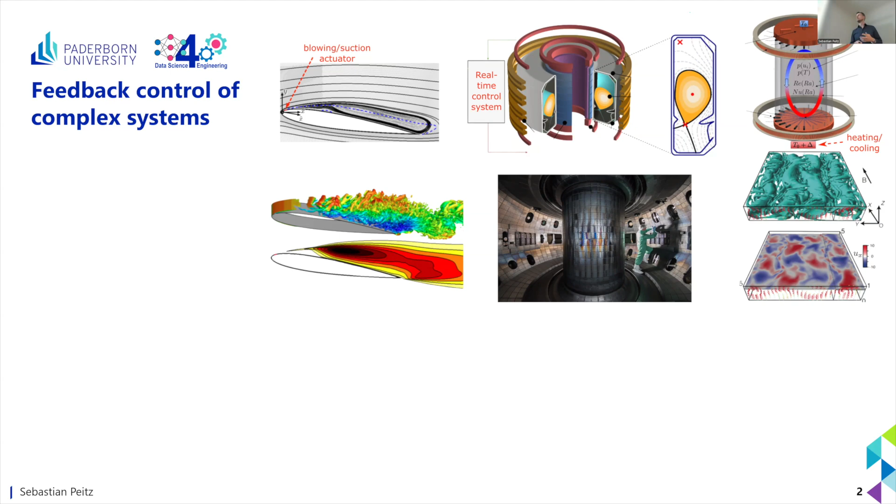This is a rather lengthy title, but maybe we can jump over this and dive right into what I want to do. So my overarching goal in my research is to study complex systems, mostly governed by partial differential equations. So potential applications: fluid mechanics, aerodynamics, we're starting to look into coupled physics, magnetohydrodynamics, where you have even more complex physics, or Rayleigh-Bénard convection, where you have these buoyancy-driven flows. So all of these systems are governed by PDEs, so the state is dependent on space and time.

And standard numerical discretization schemes like finite elements, finite differences can usually be used, and they are super accurate and also efficient by modern standards. But still, if the complexity becomes this high, then they tend to be very expensive to simulate. We need high performance computing to do so. And even more problematic is this if we want to use the model several times, determining feedback laws or solving optimization problems, so classical multi-query contexts.

So this is true for two topics that I would like to cover today, which is the control case using model predictive control on the one hand, so I'm using a model to solve an optimization problem online, and reinforcement learning, where I try to train an agent that learns by trial and error with the system how to optimally influence it. And so the aim, since these are so expensive, is to exploit structure in the system to learn models or learn control laws in a more efficient manner.

And what I mean by structure is something I'm going to talk about in quite a bit of detail. Structure also means I can use a learning algorithm that specifically is tailored to dynamics. And this would be a simple structure: I know that I'm dealing with dynamical systems. But we are also going to talk a little bit about symmetries. Can I use additional knowledge on my system so that it is even more efficient to solve the learning problem, and then use these models further on?

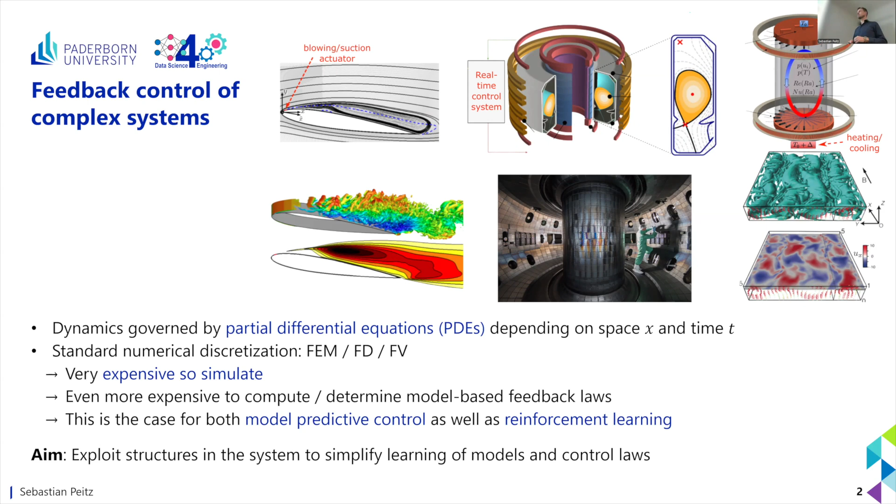Okay. But before we dive in, it's very cool that I'm in Erlangen, and particularly in the Felix Klein building. A small reference here: there's a very popular area of machine learning nowadays that is called geometric deep learning. The authors of this book, not yet published, but a rather substantial book about this topic, argue that they have been heavily influenced by Felix Klein and his idea of using symmetry as an overarching concept for many branches of mathematics.

And they don't claim to make equally substantial contributions, but they say that they have been heavily inspired by this mindset, to use symmetry concepts in connection with machine learning, to show that symmetries actually play a vital role in many areas of learning as well. And I find this really cool because of the location, but also to see that something rather old, 150 years, still has a significant impact on topics that Felix Klein would never have thought of, at least I guess. So this is the statement: geometric deep learning.

And I'm not going to do geometric deep learning in that much detail, but I'm going to use this idea on symmetries and hopefully be able to increase the efficiency.

Okay, but before we do so, this is the setting I will study, rather abstract, and it's the computer science notation, right? So instead of a state, usually X or something, I use S for the state variable. I use A for my action, which we know as control U oftentimes in dynamic systems. But nevertheless, it's just an abstract formulation of a partial differential operator. I don't worry with the boundary or initial conditions at this point. It's just to show I have a PDE like the fluid mechanics problems, heat equation, whatever you can model in this way.

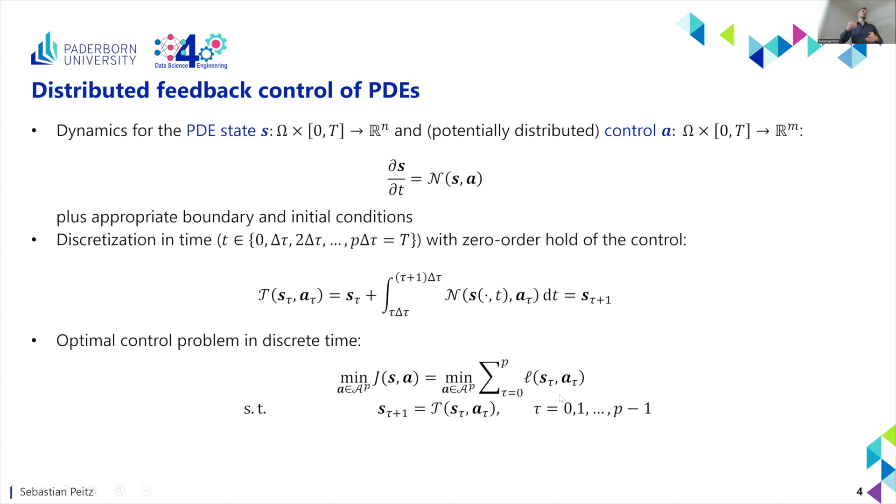So I have the dynamics for my state S, which is the PDE state. So it's still a function of space. And I have this objective function that depends on the entire state and action trajectories. So it's some sort of stage cost, minimizing the distance to some objective or a reference trajectory.

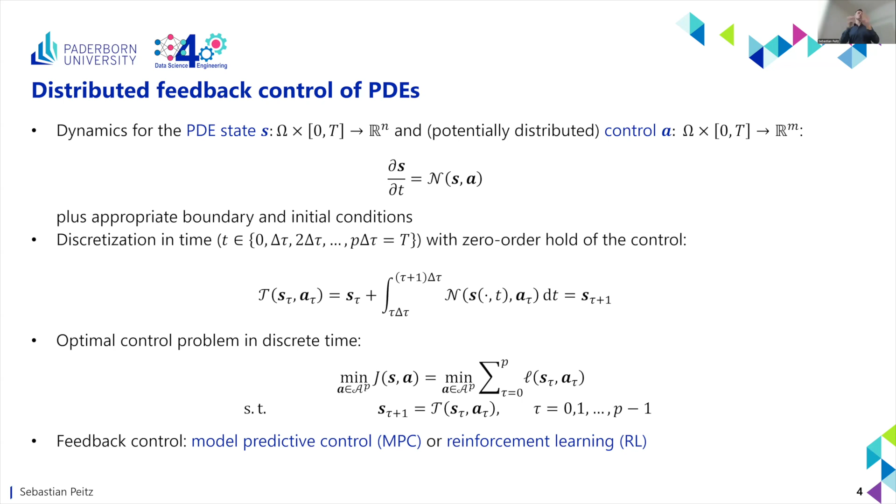Okay, so now I want to use a feedback control rule to stabilize my system or steer it in a certain direction. And I want to use both these approaches that I mentioned earlier, model predictive control and reinforcement learning. And actually, I would like to show you that they are two sides of the same coin, essentially. Okay? So if we think about model predictive control, then we usually have this real system, what we would call a plant sometimes. We measure the state or some function of the state. For simplicity, I'm just saying I'm measuring the state.

And then I'm using in my controller this open loop optimal control problem. And once I've solved it, I apply the action or the first entry of this action to the real system to close the loop. And then I repeat this procedure to obtain really a feedback behavior that is more robust than open loop control. And so if the model is expensive, then what we do to accelerate it is we use data to learn a model, right?

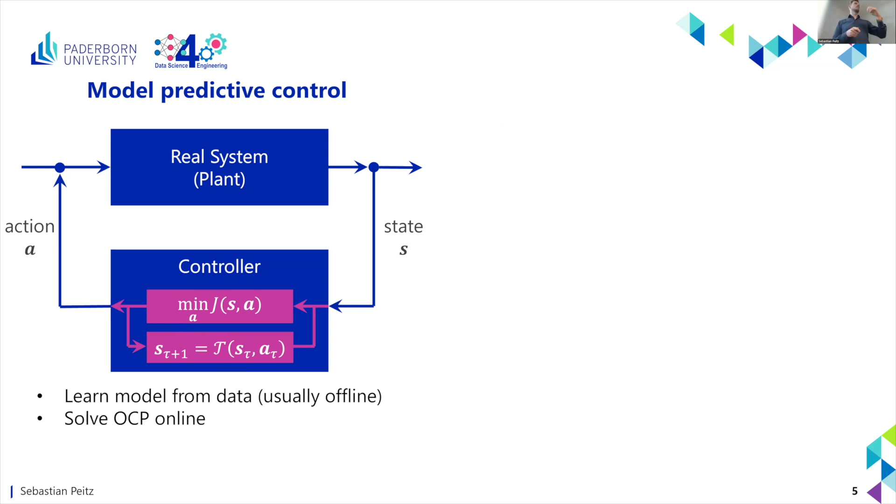So this big T here is what is usually expensive because it's a time step of my Navier-Stokes equations, for instance. So I need to really compute a lot to solve this. So the goal would be to replace this T by some model that I've learned from data, offline maybe, and then solve the OCP online, which is much faster, given that I have a more accurate or a faster model.

And so whereas the challenge on the left-hand side is, well, it can be very expensive to solve the optimal control problem online, and you have a challenge solving it faster than real time. On the right-hand side, we have the problem that, well, it's quick to evaluate. Usually pi is modeled by a neural network, or maybe even a linear function approximator, so something that is quick to evaluate. However, the training can be super, super expensive. And so these are the challenges: real-time capability or sample efficiency.

And so what I would like to do is to split my talk into two halves, talking about how to find models first for MPC, and then how to use symmetries directly in reinforcement learning to use my system knowledge to reduce the training data that I need. Okay, so let's start with MPC. And with this example that I'm going to use many times, or related problems.

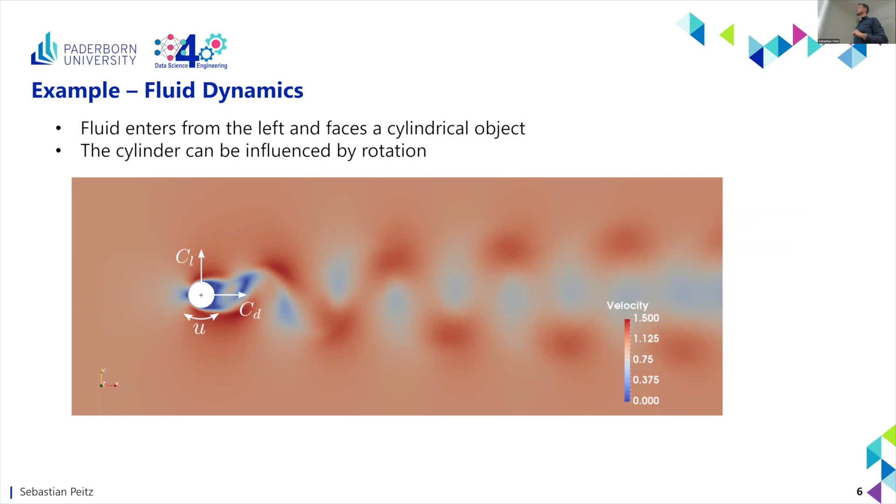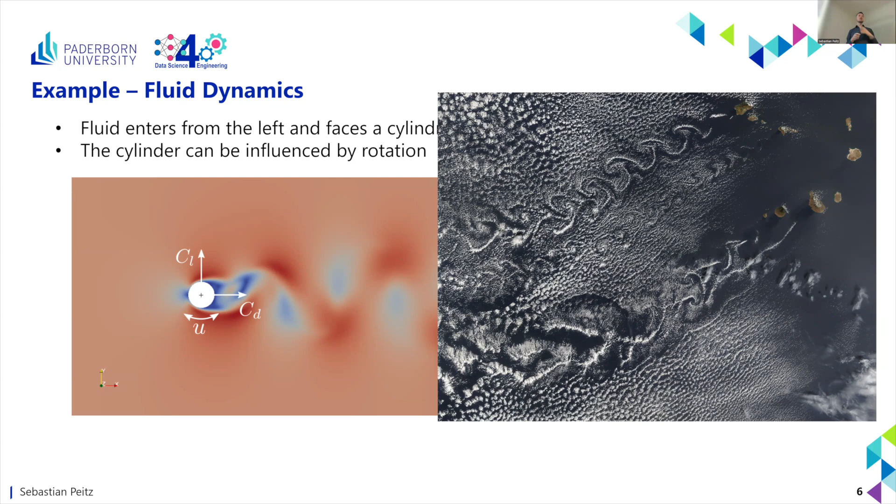Well, of course, I cannot rotate the island, so this is where the analogy stops, but I would like to do this in, let's say, an aerodynamic setting or something like this. So what I can argue is actually what we usually want to do is we want to influence the forces on this object, right? The lift force maybe, or the drag force.

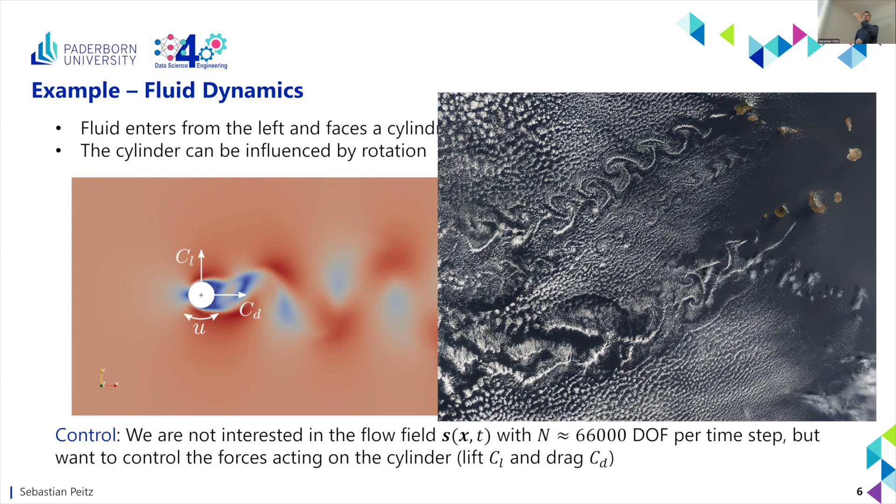So if I use finite volume to discretize the state, I get 66,000 degrees of freedom every time step, but I actually don't care about this. I only care about the forces that I want to influence. So one thing you could do, and what people have been doing a lot in recent years, is to simply use deep learning and say, I don't care about anything. I measure data, I train a model, and let's go.

And this is something you can do, right? Here the architecture doesn't really matter. What matters is you have the measurement, which I will call Z here, which is lift and drag at time instance K, and the corresponding control input U, or action A before. And then you have some recurrent neural network architecture that predicts the next time step.

And if you have something like this, then you can formulate on this an objective function, and you can backpropagate to calculate derivatives, and then you can solve this open loop control problem for MPC, as I said before. And if you do so, then you can do, for instance, lift tracking rather easily.

Okay, so this looks convincing, but we have two challenges. First of all, it's very data hungry. So you need tons of training data, tons of offline simulations to actually train such a neural network. And we have no guarantees at all. So it works apparently, but well, I don't know who would enter a plane steered by such a neural network, right? It's rather unreliable, I think. And this is why people don't do it.

And so here comes the first, let's say, knowledge exploitation. Let's use something that is more tailored to really dynamic systems. And what we're going to use is this idea of the Koopman operator, which I will introduce, hopefully, pictorially. It's an idea that is almost 100 years old. It was introduced by Bernard Koopman, who is the name giver, and John von Neumann in the 30s, because this was the time where quantum mechanics became really popular. It still is today, obviously.

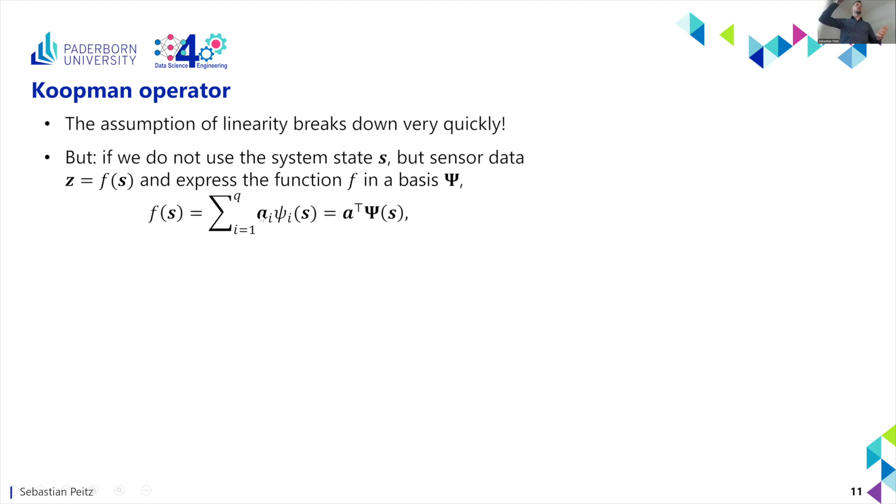So what we can do is a standard Galerkin approximation of my function. So I'm going to say my function f is composed of a basis psi_i, and I have these coefficients a_i, and so I'm introducing a finite dimensional subspace of this function space that I'm considering, right? F lives in L2, let's say, and this is now a subspace of L2 spanned by these functions. So everybody in the room will know this, right? You take a Fourier basis, for instance, and you can approximate any function as long as you take sufficiently many of these basis functions. And this is the idea, basically.

And what you do is you change the regression problem not to using S and S at the next time step, but this version with the Galerkin basis for my function space F. And then you can see this matrix K, and it's a different matrix than before. The dimensions are different, obviously. This is now a much better approximation of this Koopman operator, right? Because what I get is the Galerkin projection of the Koopman operator onto the subspace spanned by this dictionary of basis functions that I selected, right?

And then there's theory telling us, right, if the data goes to infinity and you measure it from some appropriate measure according to the dynamics, you have convergence to the Galerkin projection, and if this dictionary grows infinitely large, you have actually convergence to the true object.

And people have started looking at finite data error bounds more recently as well. So there's more theory, I would say, than there is for neural networks. And this is why this, in my opinion, is more useful. Of course, there are also limitations. One can talk about boundedness of this operator and so on. But the practical way of thinking about this is, and mathematically they are quite distinct, but the idea, I think, is related.

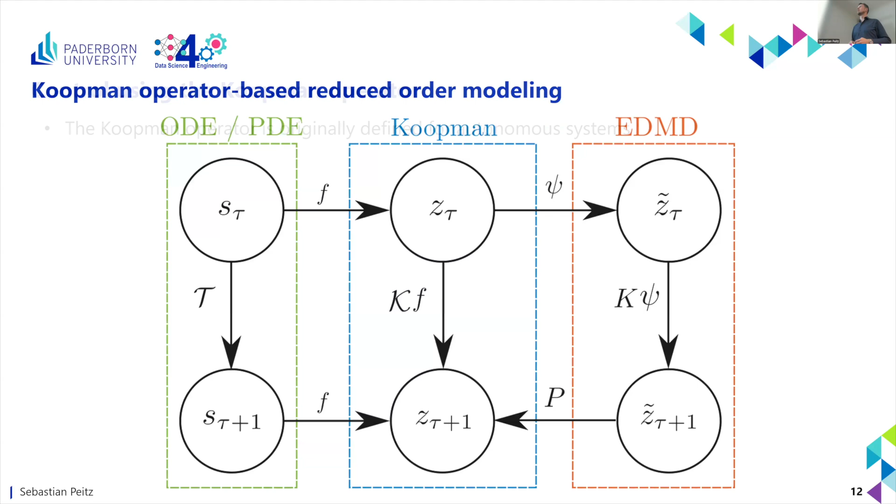Okay, so back to control. How can I use this? Because all I've done until now was an autonomous system. You know, I have a time series, I have no influence over it, and I want to use maybe the matrix to replace my Navier-Stokes solver for control. And so what I will do here is discuss a few points how you can do it.

So the simplest trick, which has been done almost instantly when it came out, was to say, okay, I'm not considering the observed state Z on its own, but I simply add the control and treat this augmented vector as my new state on which I can do regression. Okay? And then you map forward this vector in time, so psi of s_k to psi of s_k+1, or tau is my index here, and u_tau to u_tau+1. But the mapping in the control doesn't make any sense.

So what you end up with is a simple linear regression problem that maps this right-hand side of a linear system to the next time step. So what you get is this type of linear system. And you may immediately recognize this seems to give you a dynamic system, but we have left the Koopman domain quite a bit, because this looks straightforward like linear regression or system identification as it has been known for quite some time, I would say.

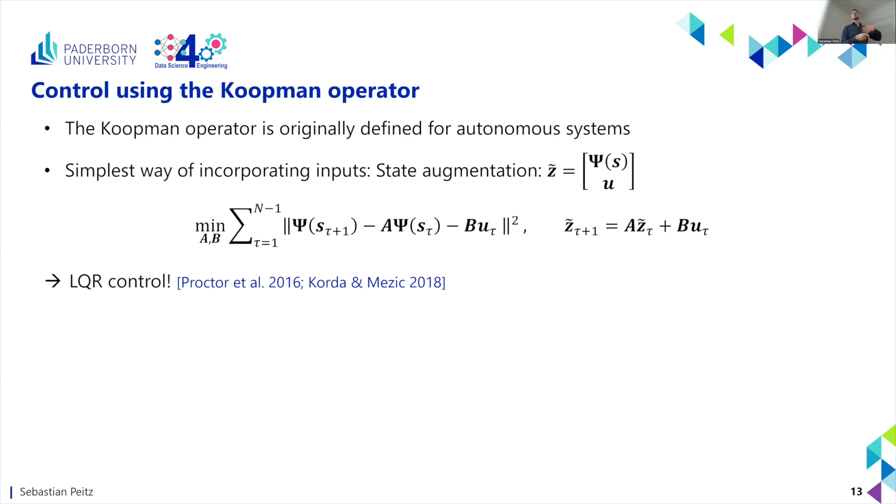However, if you do it, you can use LQR control, right? So you have a linear system, you formulate a quadratic cost function, so you can solve the optimal control problem by solving a linear system, which is much, much more efficient than using an iterative solver which contains, let's say, the Navier-Stokes equation as a constraint.

However, as I said, this is more of a heuristic setting, I would say. You cannot guarantee that you get a model that follows what the original data should do. And if you augment the state, if you say I want to have equidistant sampling in my data space, then this augmentation leads to an exponential increase in the dimension of my measurement space. Right, so there are alternatives, which I'm not going to talk about in too much detail.

One can again show that because this operator is a linear operator, you can carry over control-affine properties of the original dynamics to these operators. And so linear interpolation between different operators measured at different fixed control inputs is possible, or you can go back to switching between different operators. So these are just two options to avoid this exponential growth.

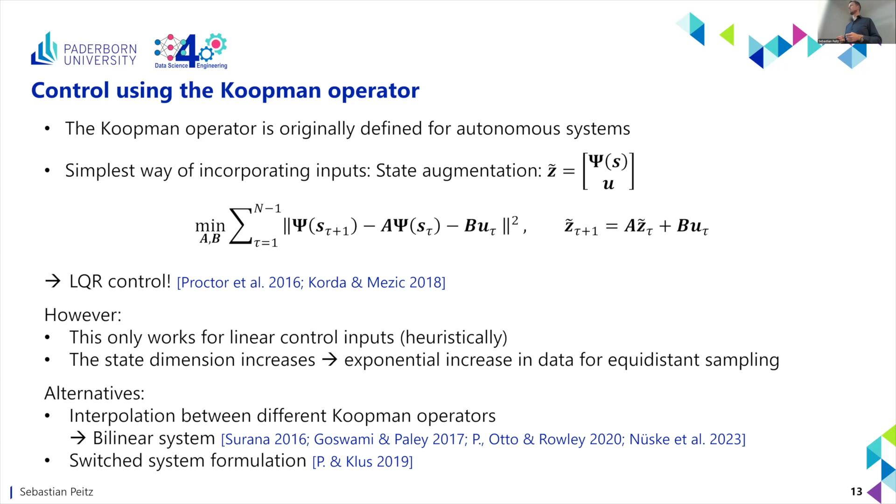And these are also, well, favorable, I would say, because you can leverage all these theory results for the autonomous case. All right. So now we have gotten a bit of an idea. Let's see an application. Right, so what I'm going to do here is, again, the Navier-Stokes equation as I had it before. And I'm defining my observable function as the function taking the flow field and measuring the lift coefficient, the drag coefficient, so the force acting on the cylinder, plus I'm placing 6 of these measurements in the wake where I measure the vertical velocity. So I have an 8-dimensional measurement.

And now I can learn a surrogate model for these measurements, which depends now on my control input. I'm glossing over details a little bit, but you can say, I'm learning data for rotating left, for not rotating, and for rotating right. These are the 3 different versions. And then I'm asking, well, which should I apply to do so? So what I'm doing is I'm taking data, a long time series with different actions. I'm plugging these into my EDMD algorithm.

I define a dictionary that lifts these 8 measurements into a 40, 50 dimensional space, simply by taking monomials up to degree 3. And then I have this optimal control problem, which means, you know, take this linear dynamical system and minimize the distance of the first entry of my measurement to the reference lift trajectory. So I've replaced my Navier-Stokes solver by this matrix vector multiplication in hope that it does something as I would like it to do.

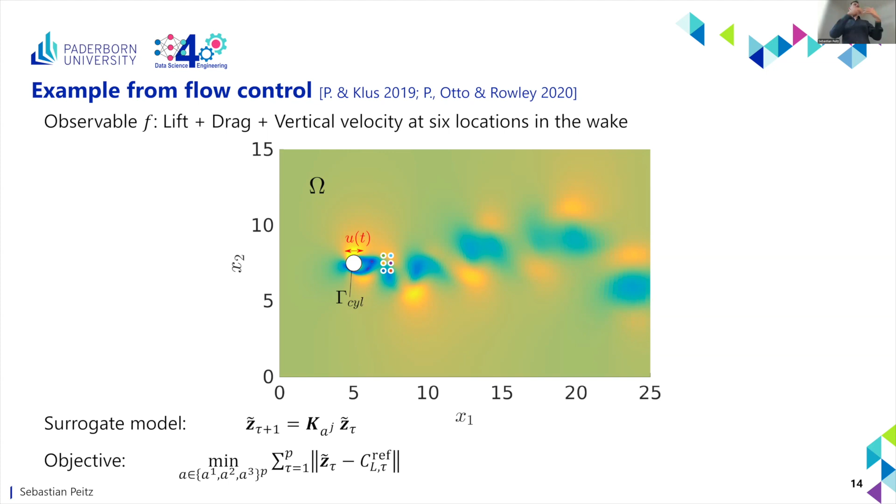And let me be clear, there's no guarantees here, but MPC is a very robust algorithm because you don't do this offline. You do it multiple times and only apply the first part of the control that you've computed to the system. So if the model is not very accurate, it doesn't hurt us in MPC. In open loop, you have to be much more careful on modeling. In the feedback MPC setting, nudging your system in the right direction is usually quite helpful.

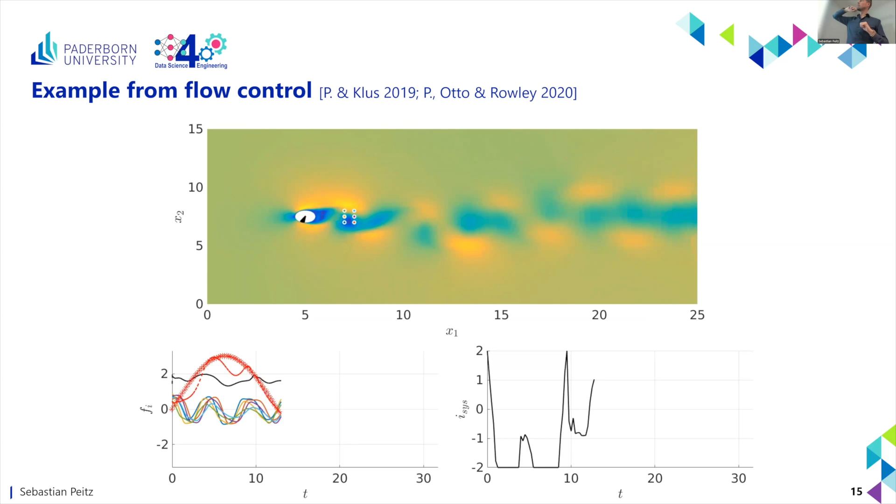And so what you see here is on the top, you have the Navier-Stokes system, and on the bottom left, you have what our Koopman model basically sees. So you have these 6 colored measurements, which is the velocity in the wake, and then you have in red the lift trajectory and black the drag trajectory. And the stars is the sinusoidal shape that I would like to track. And on the right-hand side, you see the cylinder rotation, which is visualized by this piece of cake and a cylinder in the top. And so you see that actually we achieve rather nice tracking of the sinusoidal curve, except in places where we hit the control bounds.

So we have replaced a complex nonlinear solver by a data-driven model that takes just sensor measurements. It's not a perfect model, but it's sufficiently accurate to use it in MPC. And of course, you accelerate the MPC loop by several orders of magnitude because, well, obviously, matrix vector multiplication in 40 dimensions is much, much cheaper than using an iterative or implicit solver for the PDE.

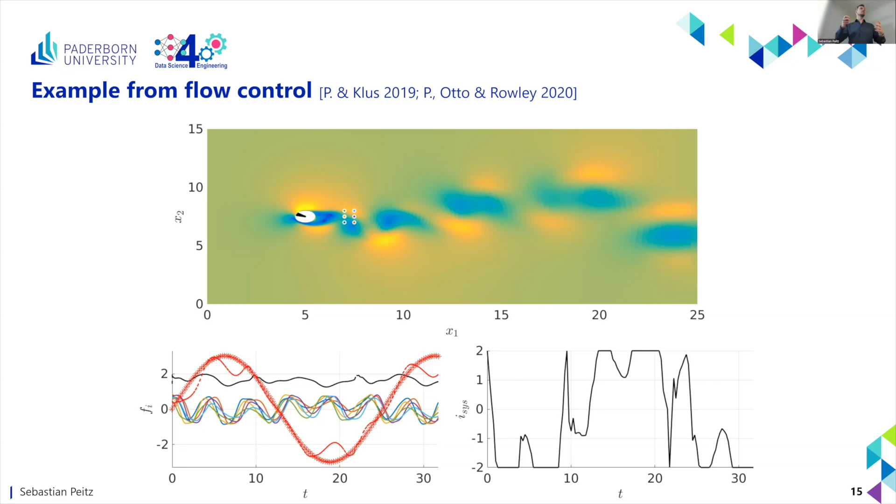Okay, so where does this leave us? Well, I started with Felix Klein and the Erlangen program. Then I deviated a little bit to dynamical systems, but maybe we can use this idea from the beginning in a very simple manner, to be honest. But maybe we can use it, okay? So the idea is, can we do more than just taking some measurements and fitting a matrix? Can we use more system knowledge to get even better?

And so what we are going to use as an example is the Kuramoto-Sivashinsky equation. So it's a very well-known nonlinear PDE, which sort of models the propagation of flame fronts. But the details don't really matter. It's such a nice example because this is the non-dimensional version. I will have the dimensional version later as well. So there's parameter mu. And depending on your choice of this parameter, it's a very simple system. It looks like the wave equation. If you increase it, it gets more complicated to this bimodal behavior, and it becomes fully chaotic after some value for mu. So you can study really nicely the complexity of the system and then how your model behaves.

Okay. And so what we see is there are apparently symmetries in the system, right? So there's a flip left-right or top-down in the way I've drawn it here, symmetry in terms of space. And also there's a continuous translation in space, right? So if I initialize my PDE differently, you know, I shift it and then apply the flow map, I get the same as if I apply the flow map and then shift the resulting state. So equivariance with respect to shift.

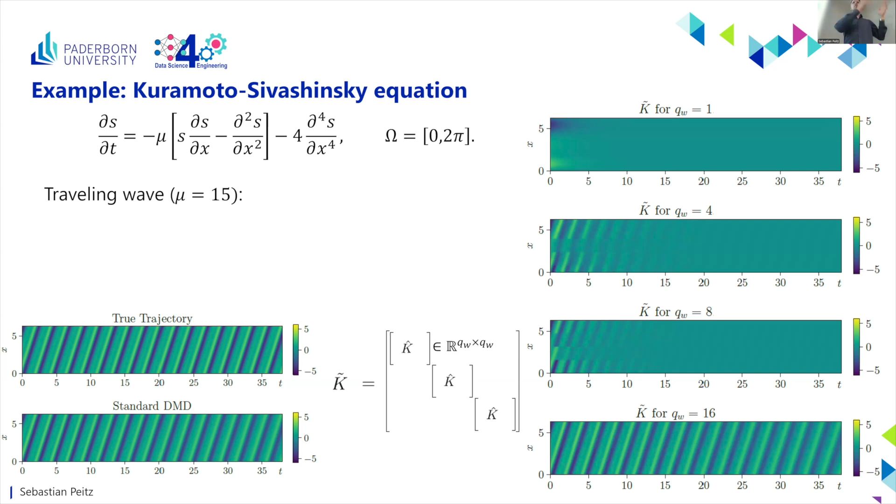And what people do in this Koopman business usually is look at the eigenvalues and eigenfunctions of the matrix in hope that they resemble the eigenfunctions and eigenvalues of the operator. And if you look at this and we computed the eigenvalues of these matrices here, these are the 4 pictures, this one, this one, this one, this one. You see then one eigenvalue obviously doesn't do the trick. This is the complex plane now, because it cannot have oscillating behavior. But you see that the larger we make our measurements, the better we approximate the, let's say, leading eigenvalues in terms of the low frequencies. And then it's not surprising that we rediscover basically the wave equation in the end.

Yeah, so let's say it's a starting point, but I think the usage of symmetries or the knowledge of symmetries that we have had for such a long time in these learning approaches, this is not my discovery, right? People have been using this in all sorts of learning for a while now, but also here it is quite promising to increase the efficiency, to enforce what we know about the system, and so on.

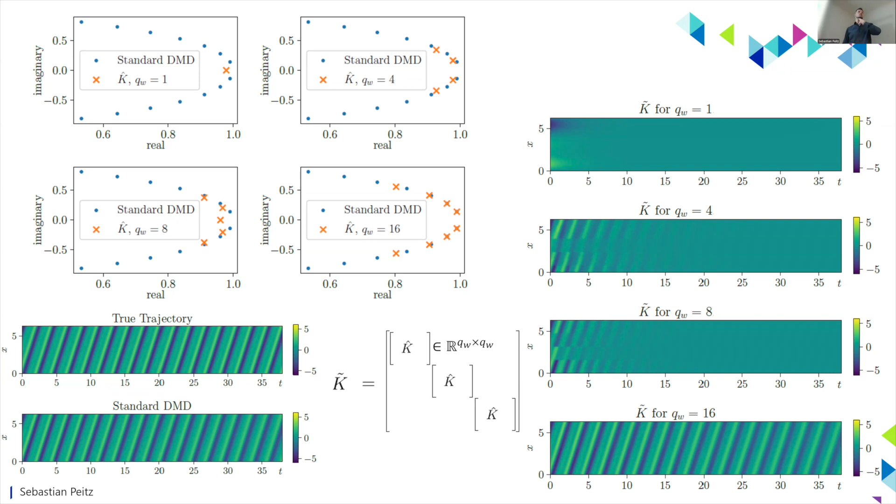Okay, so now I'm going to make quite a harsh change to the reinforcement learning side of things, right? So we have now seen we can use data to learn a linear model or approximately learn a linear model and use this. How about directly learning the policy? Okay, and so I said this is very related, and I'm going to try to make the relation more precise. So in reinforcement learning, what we have is we have an environment and we have an agent, and this agent applies an action to this environment.

And by this action, the state changes, right? So what we have is what's called a Markov decision process, which takes state and action and maps, in a probabilistic manner, to the next state at the next time step. And then what we have is a reward function that tells us how well we did with our action with respect to some objective that we have specified earlier, right?

And then this reward function basically tells us, sort of like the objective function in control, you did good or you did not so well, you should take some other action next time, okay? And so the goal is to find a policy, right? We had this earlier. So directly find a mapping from my state to the actions, also in a probabilistic manner maybe, so that in expectation, we maximize the discounted sum of future rewards.

So we look into the future for infinity. Doesn't have to be, you can also use episodic settings with a finite length, but let's say infinity for now. And we would like to find the policy that, if we follow this policy forever, maximizes this quantity. So the value function, if you're more familiar with the control setting. And so here's my attempt to link these two viewpoints.

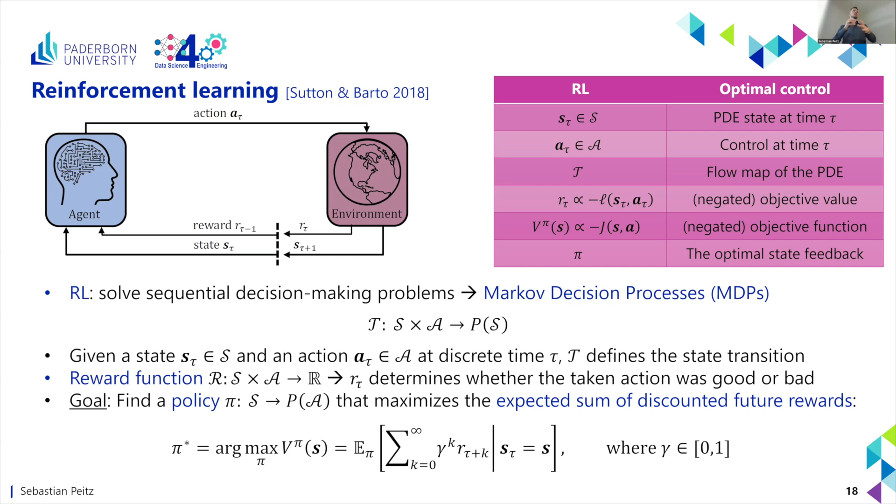So this is why I said in the beginning, these are two sides of the same coin. There's no magic to it. It's just a rephrasing basically of what we have been using in MPC. Only difference is in how we learn this feedback law. Now we don't necessarily need a model. We need to learn this pi function directly, or want to learn it directly. Okay, so let's try to do this.

Well, I've said quite a bit of this already, but if you know a little bit about dynamic programming, then you will have seen this Bellman equation already. So the optimal value function, the star means this is the best possible value you can get, and choosing the optimal action is by maximizing over all actions the current reward plus the optimal value function at the next time step. So it's a complicated problem because it's implicit in the value function, but if you can solve it, you're done, right? And this is what dynamic programming was all about for a long time already.

But we have this curse of dimensionality, right? If you do it in a graph-based manner, you start at all possible final states and then work your way backwards to see which would be the best action to take. And once you have computed this value function, you're done. However, this quickly explodes in complexity. This can also be shown if you solve the Hamilton-Jacobi-Bellman equations, the dimension really increases. So it's very well known that this is complicated and expensive to solve.

Okay, however, if we can solve it, then it's very easy to find the solution, right? If we know the value function here, then we simply have to plug in our model and see what the next step would be, and then maximize over all the A's that we can possibly choose. And so reinforcement learning is nothing else but approximately doing this, okay?

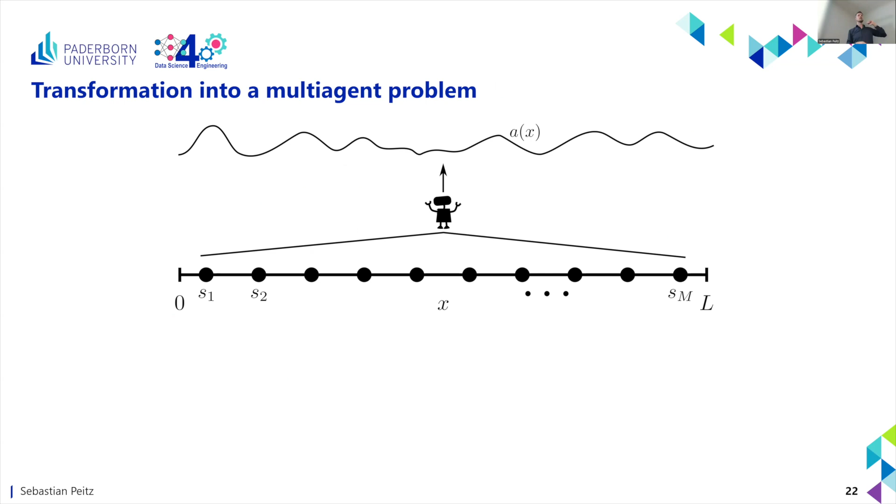Now we have this agent that looks at the entire state, which can be very high dimensional, and has to decide on a function a of x, or maybe a discretization thereof, but it could still be very high dimensional. Now let's use the second observation that I posted, that the information is transported with finite velocity. So basically, if I want to take an action somewhere here in the middle, maybe this state measurement doesn't impact the immediate decision here in a significant way.

And so what I can do is I can define this index set here, which says my local dynamics do not depend on the entire state, but only on a neighborhood, let's say 5 points or so. Looking a little to the left, looking a little to the right, and nothing more. And if I do this, in the first step I can replace this global, very large agent, which takes all the states and decides on all the actions, by local agents that only take, in my example, 5 measurements and decide on a single action.

So a much smaller agent. And then I can use my first observation. Due to symmetry, all of these agents are actually identical, because it doesn't matter where I am absolutely in space; given my measurements, I should decide on an optimal action. And so this has massive advantages for training these models, because the state dimension is strongly reduced. The action dimension is also reduced, in my case to 1. So the networks for approximating my policy or this Q function become smaller, and you have a massive acceleration in training, because we know something about the system.

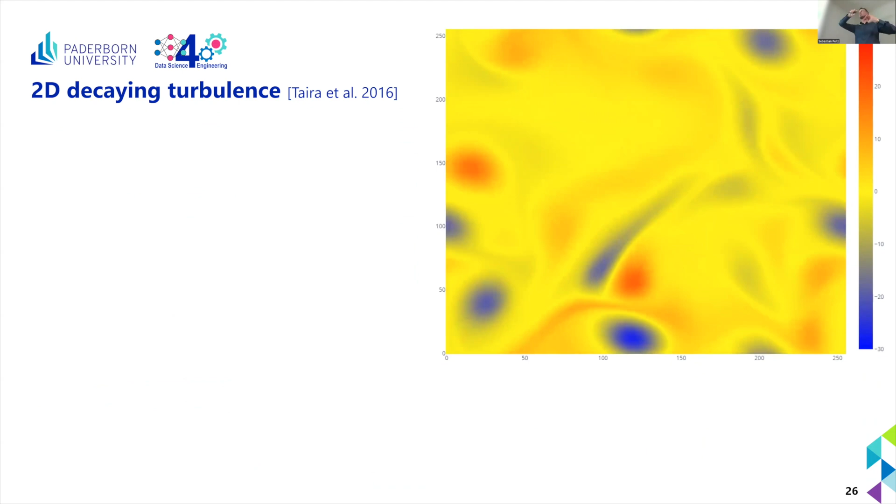Okay, so now we've done this also with more complicated systems. So you have this 2D decaying turbulence model where you have these vortices that decay on their own over time. And we want to apply these mixers locally to stabilize the system more quickly. And so I'm trying to stabilize or rotate here, and I'm looking only at the neighborhood. And if I do it here or if I do it here, doesn't make a difference.

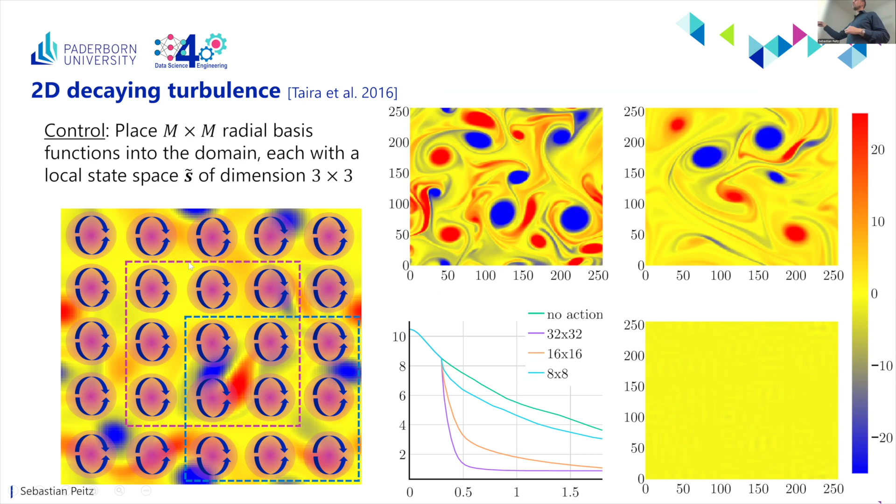So I can apply the same agent multiple times, and you see that depending on how fine I make the grid, you can actually stabilize the system very quickly and again train a feedback controller for such a system on your local laptop because you simply exploit the symmetries, right?

And now let me conclude with this example that I like the most, this Rayleigh-Bénard convection that I mentioned in the beginning. It's a very popular system where you have the compressible Navier-Stokes equation and you heat the bottom plate and you cool the top plate. So by convection, you see that you will have cold air dropping down at places and hot air popping up, and you see these plumes.

And now the task is to choose actions on the bottom plate. On average, the temperature has to remain, otherwise you could simply set everything to 0 and you stabilize the system, but find a pattern that has on average the same heat transfer, but stabilizes the system in terms of minimizing the convective heat transfer. You only want to basically reduce it to a heat equation, let's say.

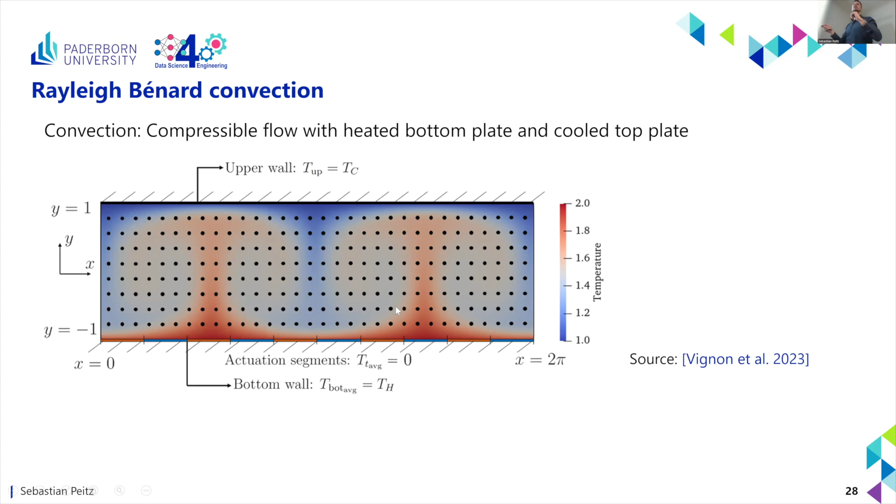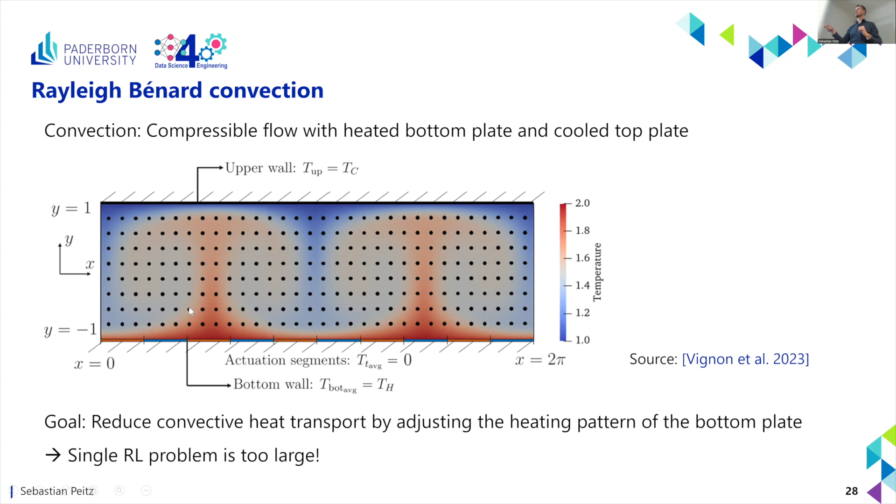And so the heat transport should be reduced, and you can do this with multi-agent reinforcement learning. So instead of deciding on all these 10 actions at the same time and taking all these points as your measurements, which cannot be done, you take 10 agents that look only at a small region left and right of their own measurement and decide. Right? And then here's a video. There's even a larger domain because you can transfer it again to large.

Okay, so this brings me to the end of my talk. To summarize, there were two paths, rather distinct, but I guess the overarching idea is control using data and system knowledge. So the Koopman operator is very efficient because it's linear regression, basically. But if you work a little, you have guarantees that are stronger than what you have for neural networks. And there's lots to do, but already today, one can do really cool things with it.